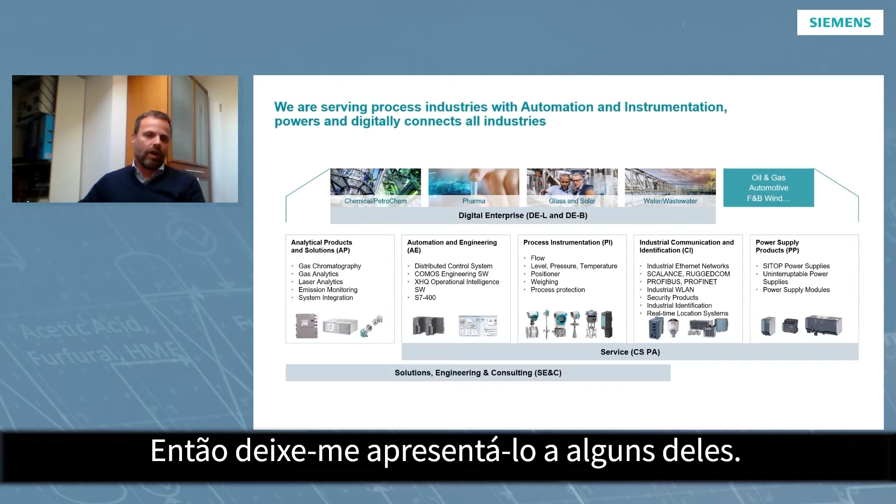As I told you, I don't want to bother you too much with our portfolio elements, but somehow we need to understand that when we are talking about digitalization, we need to base our digitalization on a very stable, high-performing product portfolio. So let me introduce you roughly to some of them. First of all, we have our analytical products and solutions like gas chromatography or gas analytics, and we also do the system integration of those systems here.

The business field of automation and engineering, we are talking here about DCS systems. And yes, it's not just one DCS system anymore. It's not just PCS7, it's also PCS Neo, which we recently launched worldwide with version 3, a totally web-based new process control system. You will get some more information during that event about this new process control system.

Then we are talking about Comos, our plant engineering tool, and XHQ, the operation tool, because still our philosophy is from integrated engineering to integrated operation. And yes, also in automation and DCS systems, we are talking about not just software, we are also talking about hardware, like our controllers from the S7400 family, but also hardware from our I/O system, the ET200SP HA. So this we are handling in the automation and engineering organization.

Then we also have on board our instrumentation, because when we are talking about digitalization, we have to talk about how to make information out of data. First of all, we need to get the data, and we need to get the data out of the field, like for example flow measures or level, pressure, temperature. You can read all of this, and you can see the examples on this slide as well.

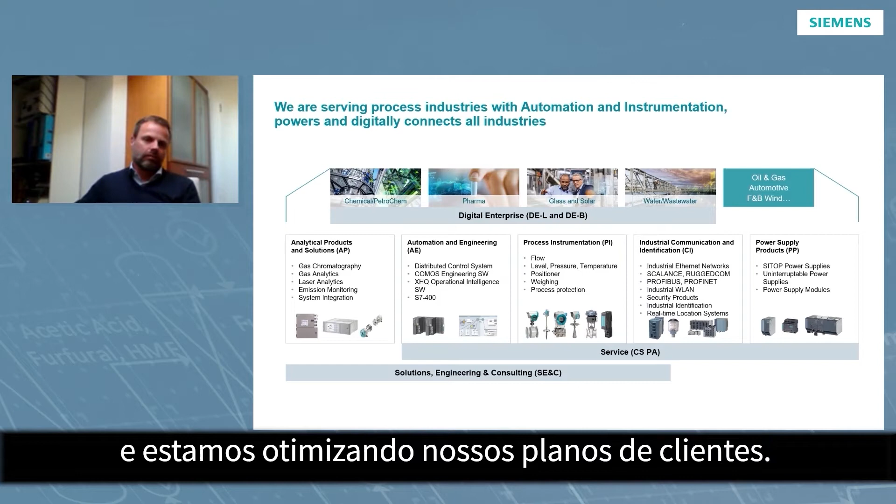In order to conclude the introduction to the process automation organization within Siemens, I want to inspire you with our strategy. We want to be the technological leader in all our business fields. I already gave you a rough introduction to our products, and you will get even more information during that event. But we even expand our portfolio with additional services and portfolios, like our applications.

We put all our vertical industrial know-how into certain software suites in our application suite, which may serve you also in very dedicated challenges of your daily work, in your daily production at your plant. I'll give you a rough introduction later on during the presentation as well.

When we are talking about digitalization, we also need to talk about digital lifecycle services. I don't just mean software maintenance services, but also the optimization of your plant being remotely connected.

In all of our business fields, we are very focused on making use of the digital twin, creating a digital twin and making use of that, simulating, creating, using models out of our industrial know-how and expertise, modeling it, and simulating certain business areas which we can then handle in order to serve our customers and help them with our expertise.

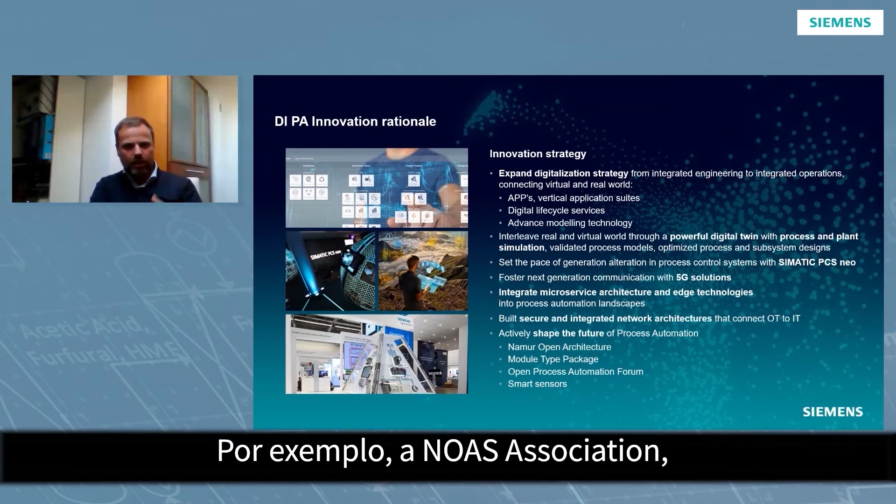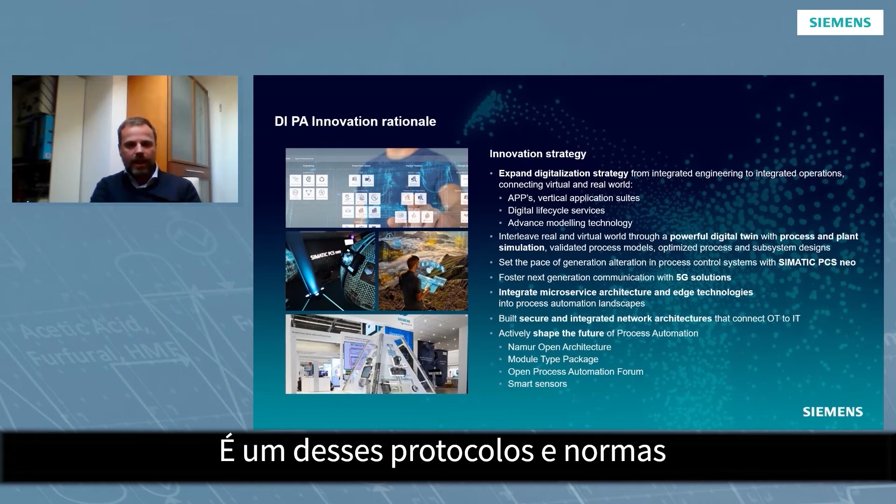For example, the NAMUR association, the NAMUR Open Architecture standards we are setting, and we are following strictly those definitions in our entire research and development of our products. Module Type Package is one of these standards, these protocols, set within a certain association in order to integrate different package units into a complete system through predefined interfaces.

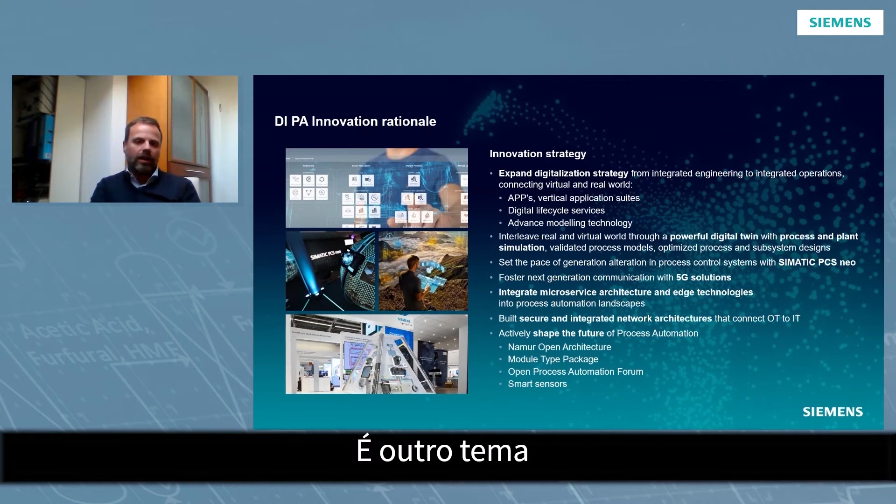The Open Process Automation Forum, for example, and smart sensors - it's another topic where, just by participating in certain associations, we are able to set standards and drive the future.

So as I told you, this was the chapter on products. Now let's enter into the templates and the projects we realized in 2020. I hope I can give you some inspiration from this as well.

Of course, you know that we are present all over the world, and that we have engineering setups all over the world. In different regions, we are facing different challenges. We have regional specific challenges, different markets, different behaviors, different cultures, and we need to serve all of them.

Somehow this year it was different because of the pandemic situation. We were somehow facing the same challenges in all the different countries.

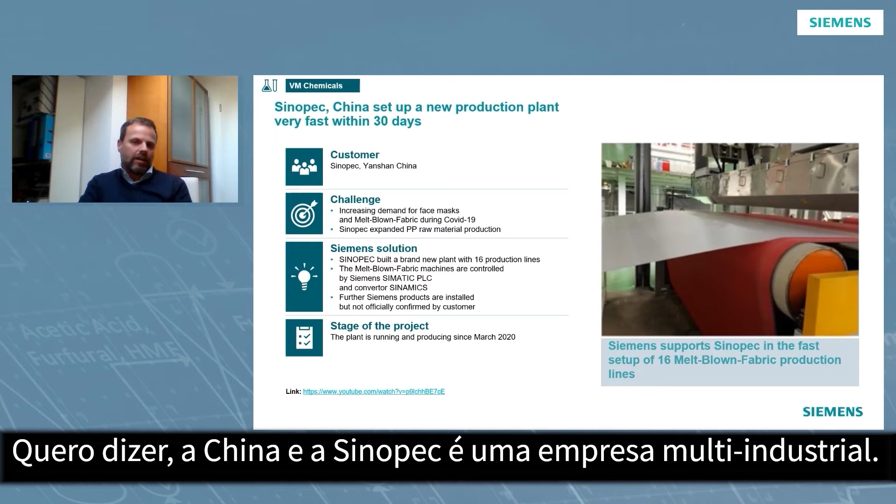You may wonder why I bring you firsthand this project here, why I'm presenting this one at Sinopec in China. China and Sinopec is a multi-industrial company. They are very present in the oil and gas market, in the petrochemical market. Actually, we did a refinery together with Sinopec in China as well, and different other chemical plants too.

But because of the very high demand for face masks due to the pandemic situation, they wanted to produce, or build up, 16 production lines, and pretty fast because the demand was rapid. We are talking about a pandemic situation, and we cannot hesitate in order to serve not just the market, but to protect our people.

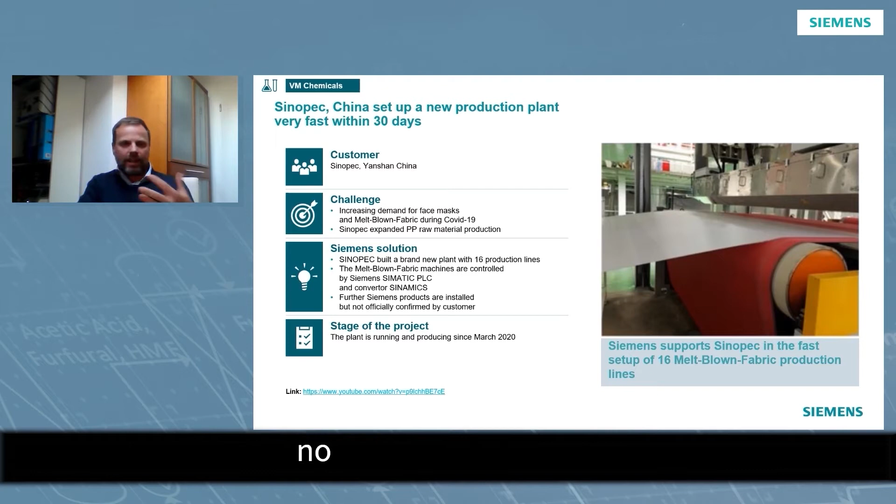So by using our portfolio elements and at the end in the realization with Simatic PLCs and our drive systems, we could realize the production lines. But these plants also have been planned and engineered based on COMOS, and we could reduce the time to market tremendously by making use of our own tools.

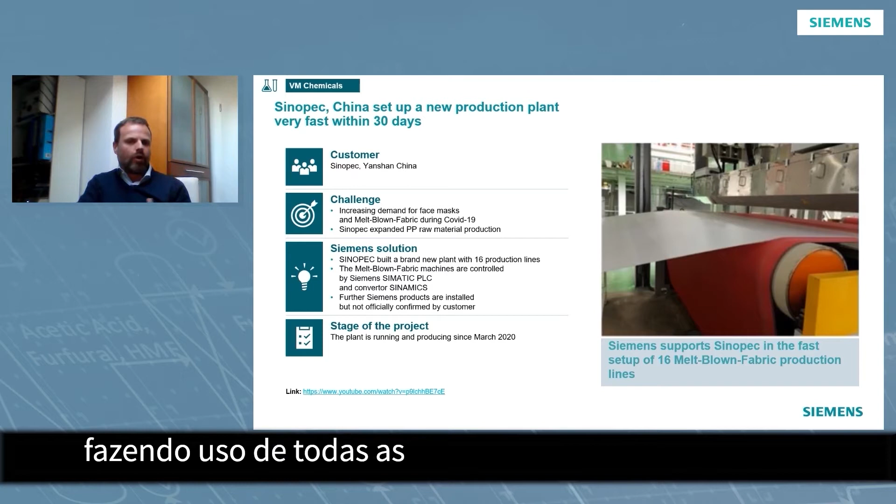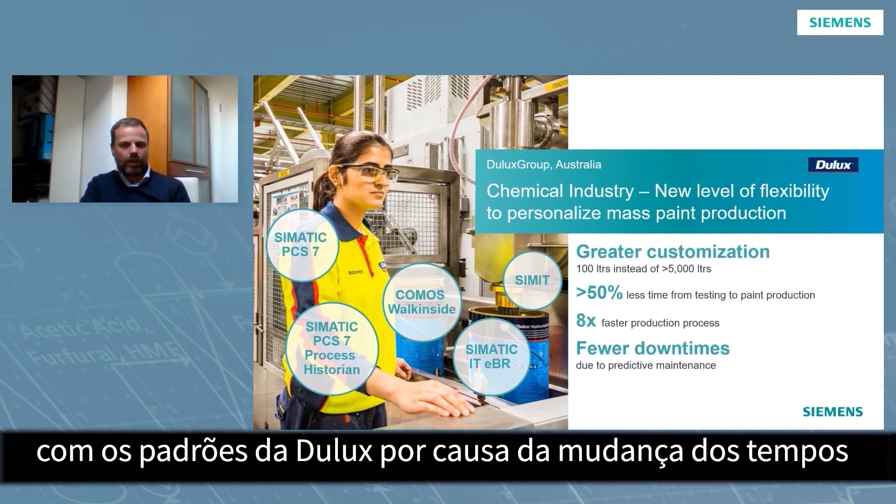If you want to paint your own house or your flat, you don't need 5,000 liters, but you still want to make use of your own color, your own blend of color. But it was not possible to produce that industrially with the standards of Dulux because of the changing times, and the production was not that flexible to reduce the lots to 100 liters, for example.

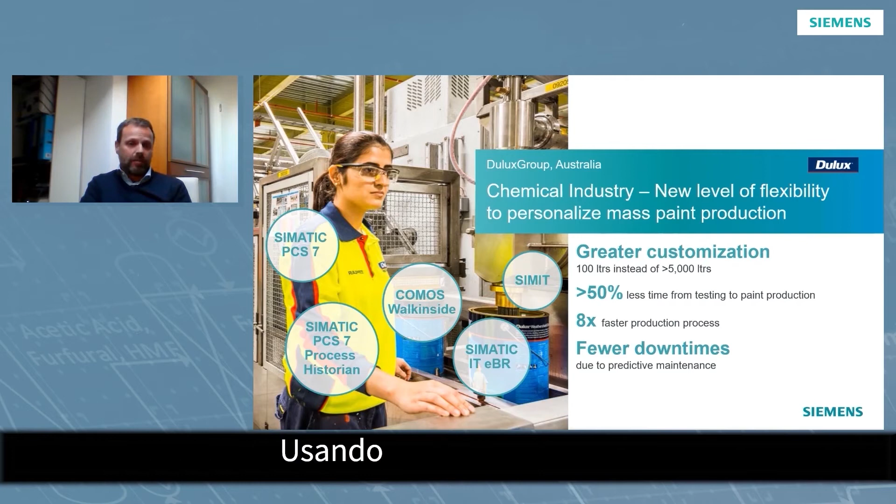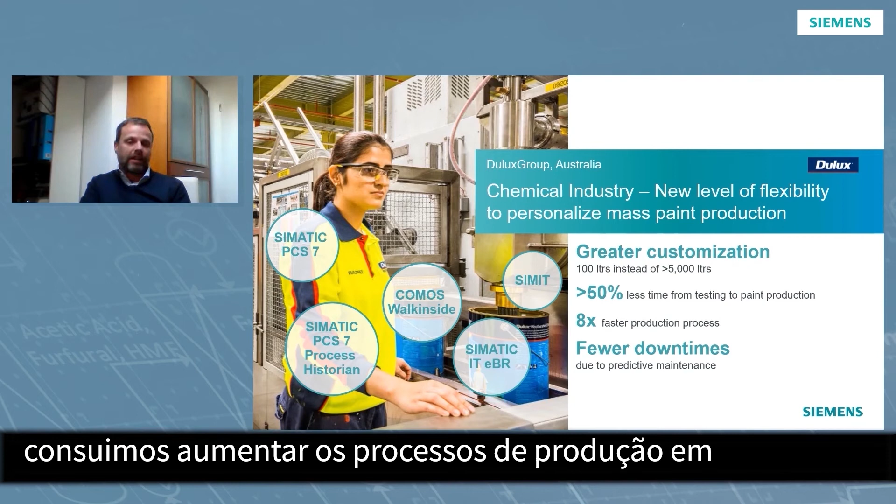By using Simatic PCS7 in combination with process historian, COMOS, and Simatic IT EBR, electronic batch recording, we could increase the production processes by 8 times. Plus, we could reduce even the downtimes. We increased the flexibility of Dulux, producing fewer lots with just 100 liters, very individual colors for the paint, and even reduced the downtimes with more stable production. I think that's digitalization at its best.

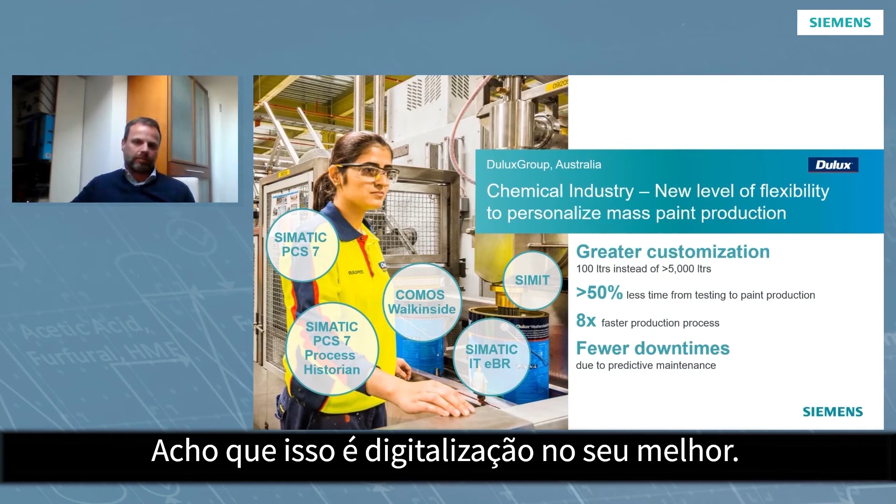Let's talk about the glass and solar industry, or let's say this glass manufacturer. Here we're facing the problem of an increased demand for glass, this container glass, and he had to increase his production facility.

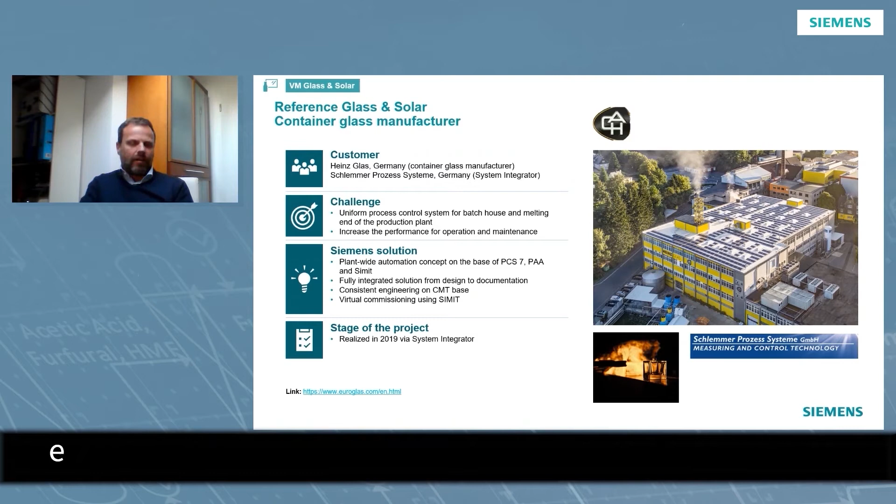And we could achieve that, again, by using PCS7, but also by doing the engineering based on Plant Automation, Plant Automation Accelerator in combination with SIMIT. So we could do the engineering with our PAA tool and then simulate the outcome already, and then hand the optimized program over to PCS7.

This is also not just a fully integrated solution, it also helps us document that. And when we are talking about documentation, it's not just to serve certain entities and official organizations. We are in the business case of standardization. We can create with PCS7, PAA, and SIMIT a certain standard which can be repeated also in other plants, based on the same data where we already made good experience.

And all the references I'm talking about, it's not just that we as Siemens are doing it. We are serving the customer, we are consulting them, but in most cases, we are serving the customer via our partners, via our system integrators, and via OEMs. And we also get good feedback.

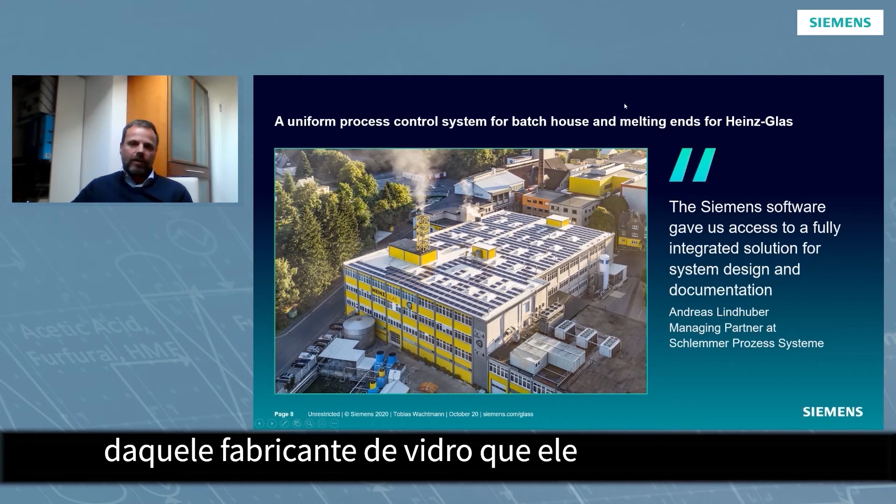When we are talking about references, we receive customer feedback. And here's one statement also from that glass manufacturer, that he is very happy to use our software, to have made good experience with our software, and to set the standards for their production facilities.

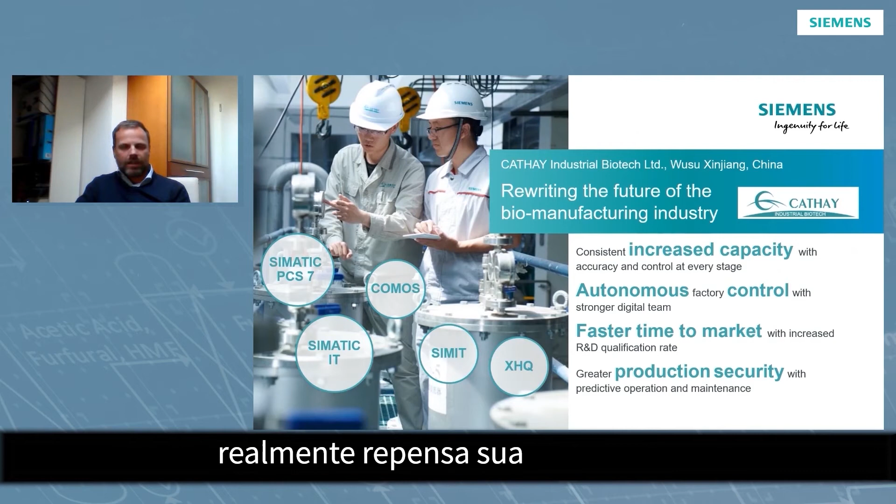Digitalization also means sometimes to change the process, to rethink. You remember our campaign in the beginning on the first page? Here, Cathay, this industrial biotech company in China, really rethought their production. They are producing polymers, the ingredients for the chemical and pharmaceutical industries.

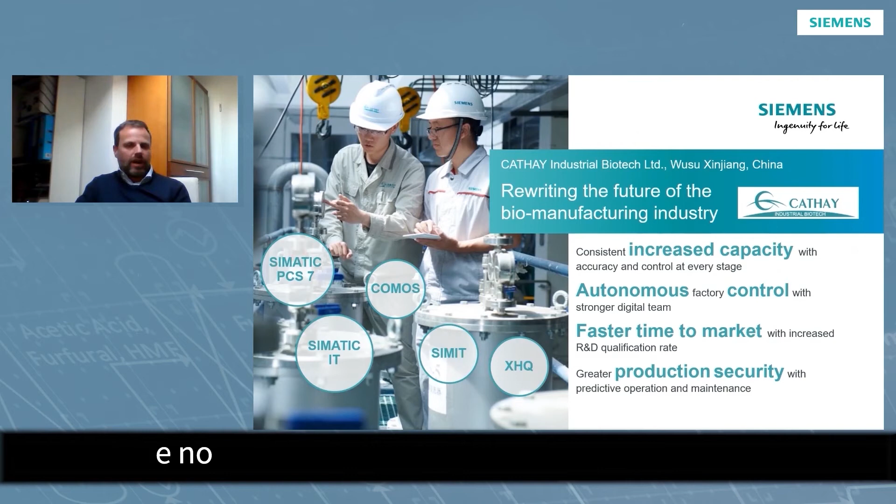In the past, it has been artificially produced, synthetically produced. Here, they are producing polymers out of corn, a complete new production process using corn for polymers. And we could serve this customer planning their process based on COMOS.

We simulated it with SIMIT, and we are producing on the basis of Simatic PCS7 and Simatic IT, and it's operated and optimized with XHQ. Again, from integrated engineering to integrated operations.

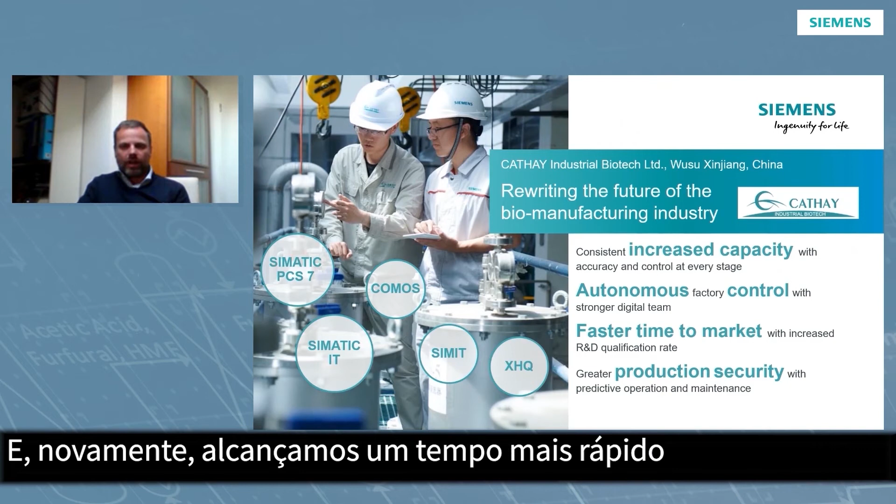We could increase the production capacity for these polymers by far. And again, we achieved a faster time to market, and we have less production downtimes. We could secure the production over the entire life cycle.

Actually, and this is brand new, to be honest, I wanted to present you also the name of this pharma customer here. You may know who I'm talking about. The challenge we are facing this year is COVID-19, how to handle the coronavirus.

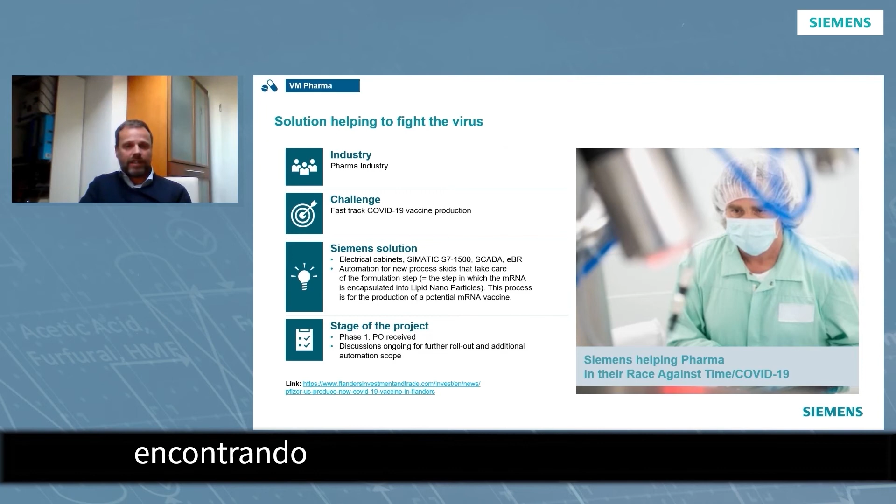And of course, everybody could think, hey, the pharmaceutical industry, they'll make a huge business in the future. But first they need to invest. They need to investigate, finding the right vaccination for that virus. You may have heard in the news that some companies are already successful and are planning to be on the market in quite some time. They're in the testing phase right now.

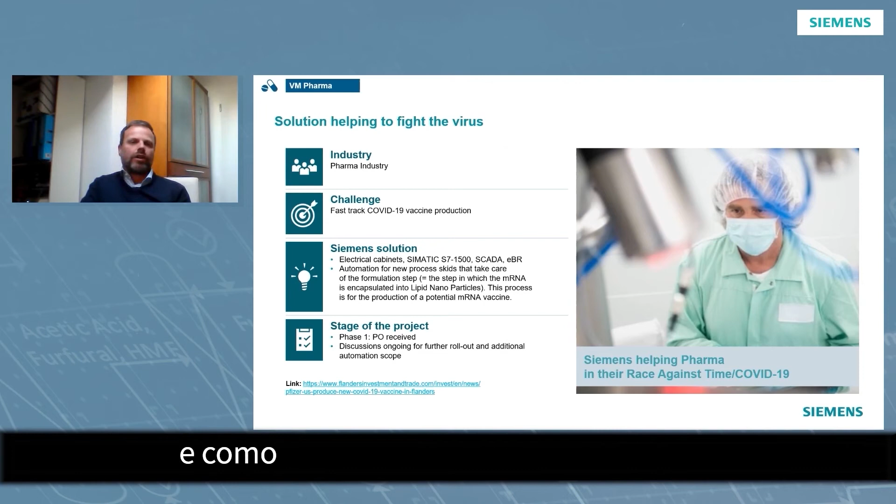As this is not finally released from that customer, I cannot show you the name, but you may know who I'm talking about. So we are together with that customer, we are partnering, we are setting up a certain production line. We were investigating, we were analyzing also in the laboratories how to find the right vaccination.

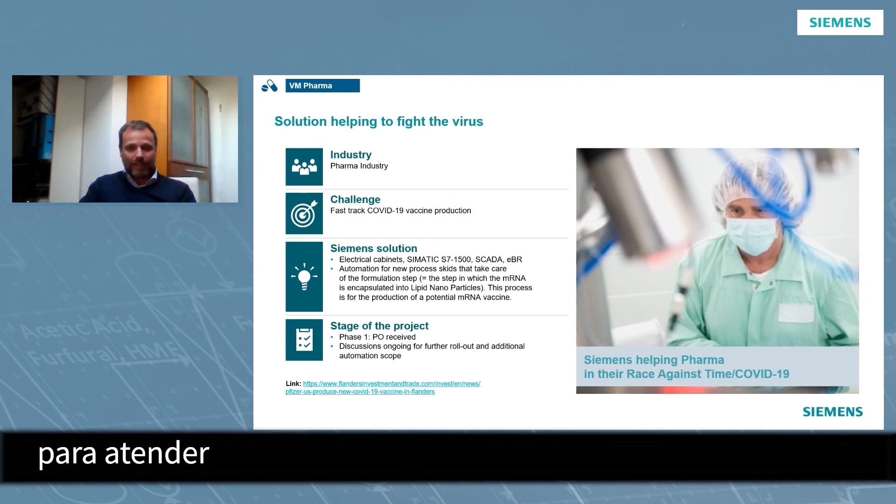And now it's up to all of us. How can we produce the huge lots in order to serve the markets, and which may, hopefully, help everybody to be safe in due time.

Let's talk about water. From my personal point of view, water is one of the most important resources we have on this globe. And although we have a lot of water available on earth, most of it is in the sea, so we need to desalinate it in order to make use of this resource.

There's a very innovative company in Saudi Arabia that wanted a desalination plant. The demand is there in Saudi Arabia - in the middle of a desert, there's not so much water available, so why not make use of seawater? Unfortunately, the seawater desalination process is heavily involved with a lot of energy.

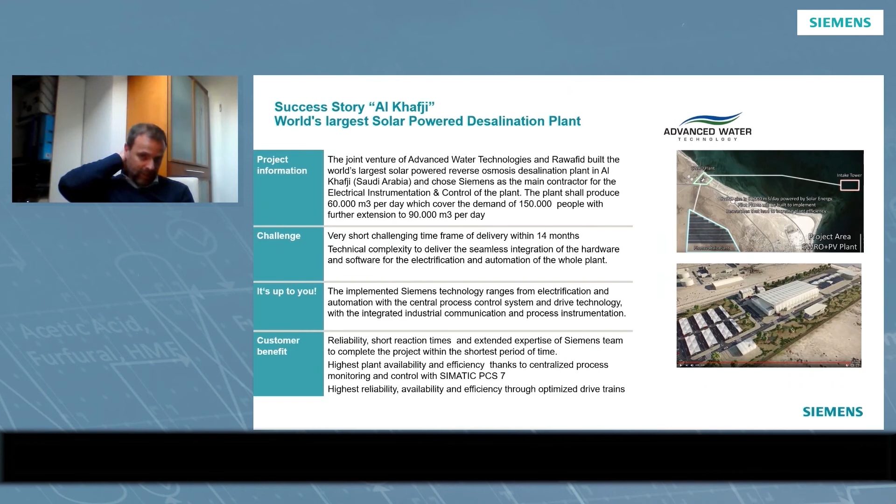But with a solar power desalination plant, we could make use of two resources: the seawater plus the solar light from the sun, using solar energy to run this plant. We planned this plant with Comos and realized it with PCS7, with a lot of OEMs involved. Huge power stations are involved, because it's not just about producing the water, but also distributing it across the whole country - a lot of pumping stations are involved as well. But it's very economy friendly, with regeneration of the resources.

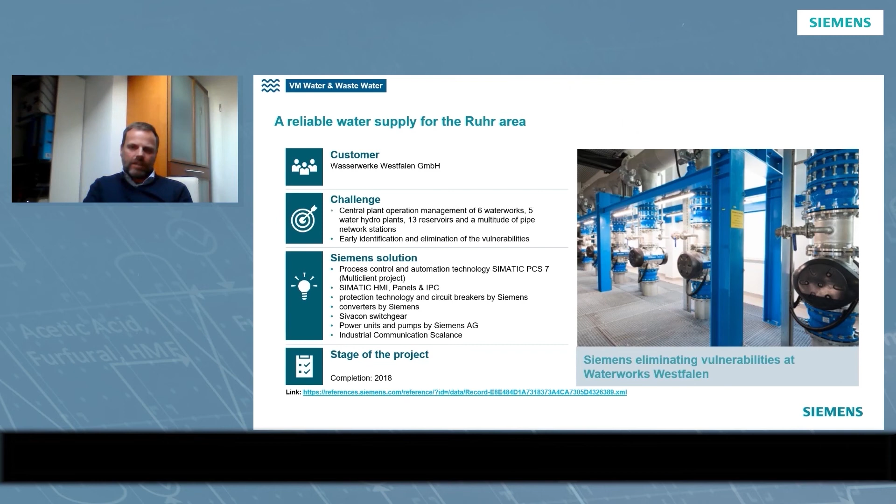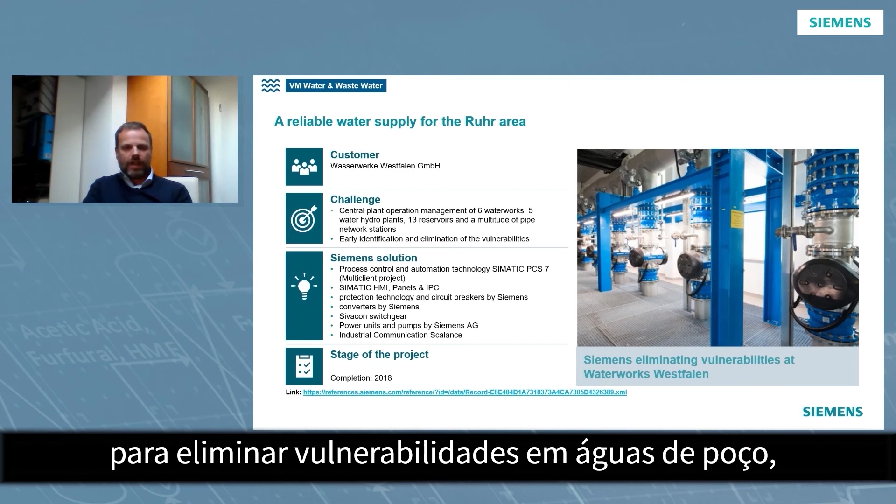One of our stable customers in the water area is, once more, Wasserwerke Westfalen. The production of water, especially drinking water, is a very sensitive field, and everybody needs to protect the plants and distribution of water, because it's a very valuable resource. So together with PCS7, but also HMI, our IPCs, panels, and switchgears from the Siemens portfolio, we could help this customer eliminate vulnerabilities at their water works, making them much more secure in their production facility and distribution of this valuable resource.

I hope I could inspire you with these examples from other customers and production facilities, showing how we can make use of digitalization, or sometimes only portfolio elements, to serve certain demands in different industries.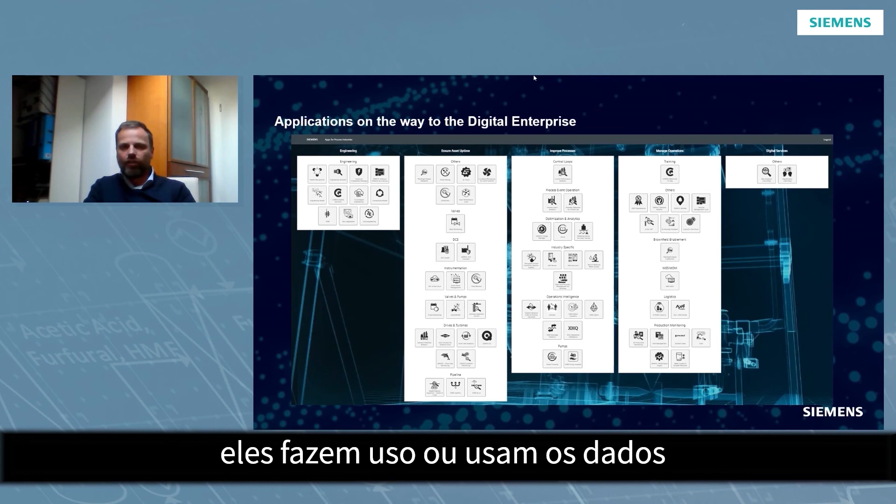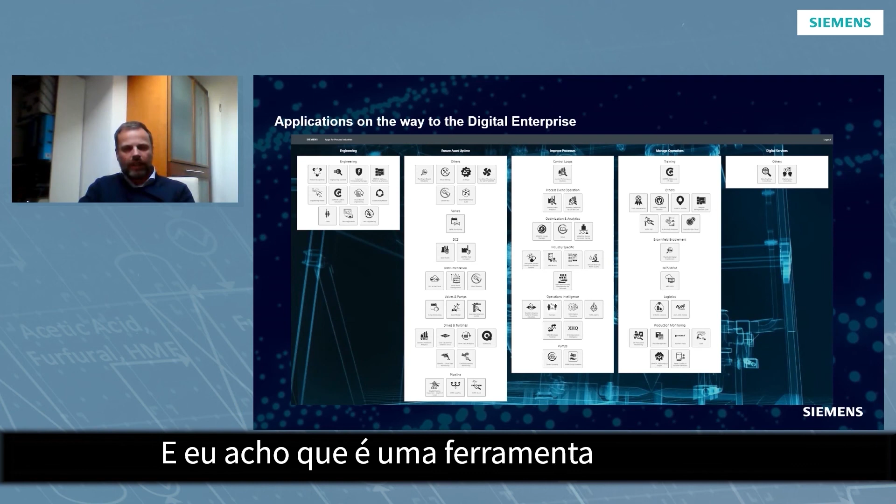For example, this application here is called My Expert. It gives you the status of your automation system, checks whether a new firmware is available and how you should upgrade to it, or where you can optimize your architecture. I think it's a very useful tool, and the data is available, but knowing how to use it is a different story - the app helps you with that.

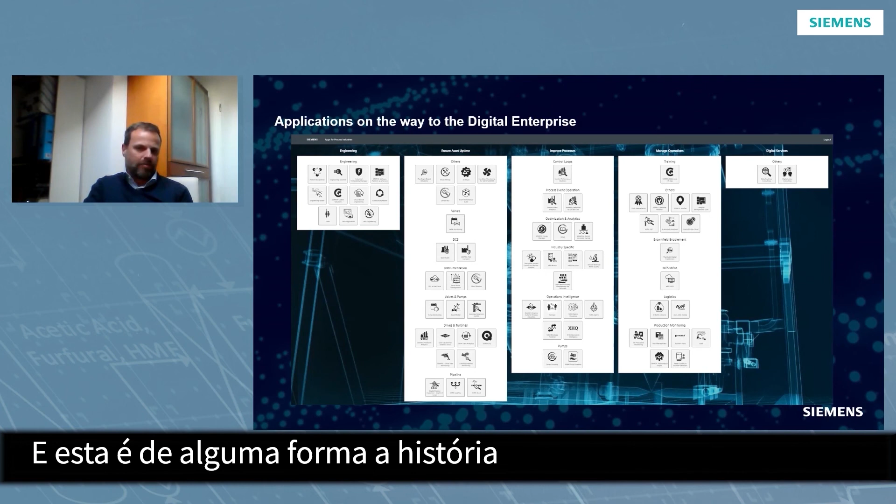This is somehow the story of all these apps. You do have access to this application suite as well, and I'm pretty sure our colleagues in Brazil will help you by sending you this link, so you have access to all these applications.